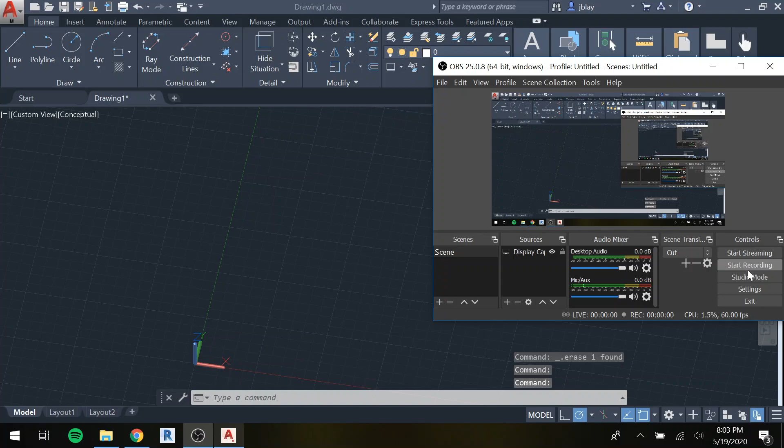The last thing we're going to talk about today are polar arrays for 3D objects. This can be very useful, especially if you're creating something like a gear.

So that's what I'm going to create here, a gear. I'll start with a circle at 0, 0, and give it a radius of 5 inches. Let's zoom in on that.

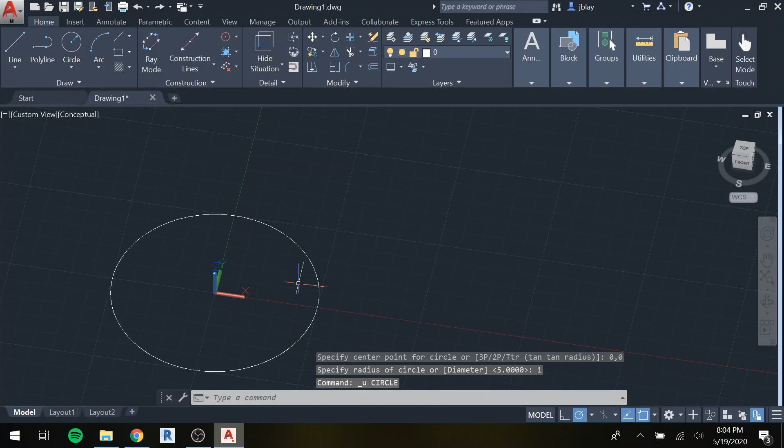Then I'm going to put a hole in the center of it, as most gears have, with a radius of 1 inch. Start at 0, 0, give it a radius of 1 inch, and press pull it up 3/4 of an inch.

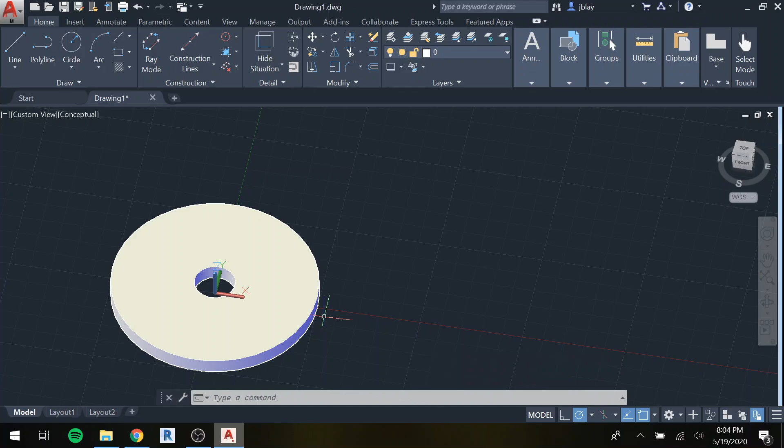Now what I'm going to do is create one tooth of the gear, and then pattern it around this cylinder. Let's get started. Because I used press pull, I still have the circle down low, so I can draw my tooth coming from it.

I'll draw this to be 1 inch long this way. Let me hop into 2D wireframe so we can really see what I'm doing. So I just drew a line here that was 1 inch long, and then I'm going to draw a line this way, 1/2 inch. Oh, I think I did these wrong. Something must be off because that's not the right proportions.

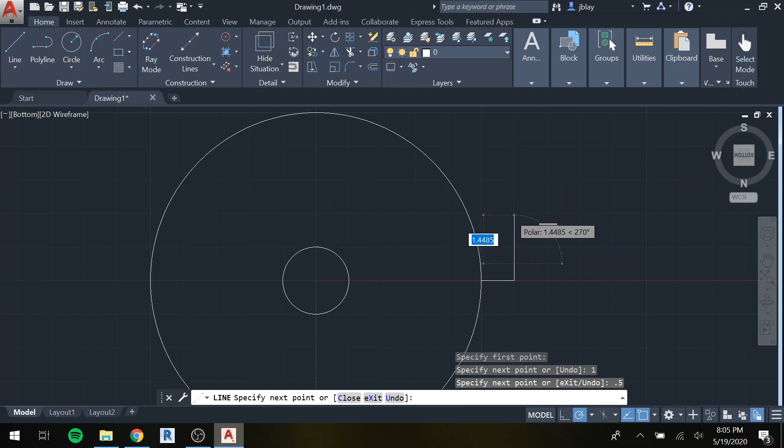Let me hop into looking at the bottom of this. I'll draw a line 1 inch long, draw a perpendicular line 1/2 inch long, then draw down like so, and then I'll mirror these two over to the other side.

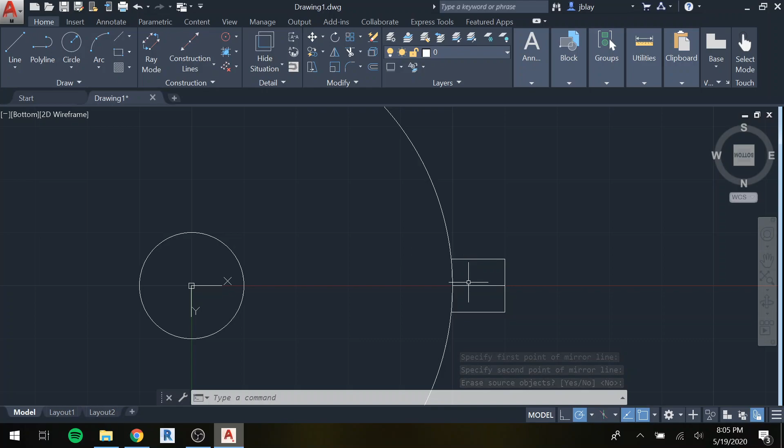If you're copying this and your tooth is a little bit different, it's not a big deal, just make sure it extends all the way to the circle here. Now I can delete this. I don't need to draw the arc at the bottom because that circle still exists, so I have a bounded area, and I can press pull this area up 3/4 of an inch, so 0.75.

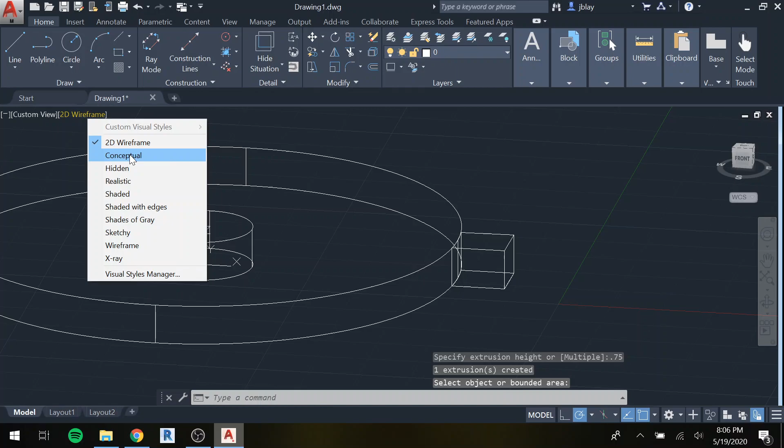Let's hop back into Conceptual so we can see what we have. Okay, we have one tooth of a gear. Obviously, if we were making a real gear, you would want that to resemble more of what the tooth would actually be. It probably has some curve in it, a tooth doesn't really look like just a rectangle, but this is good enough for what I'm showing you right now.

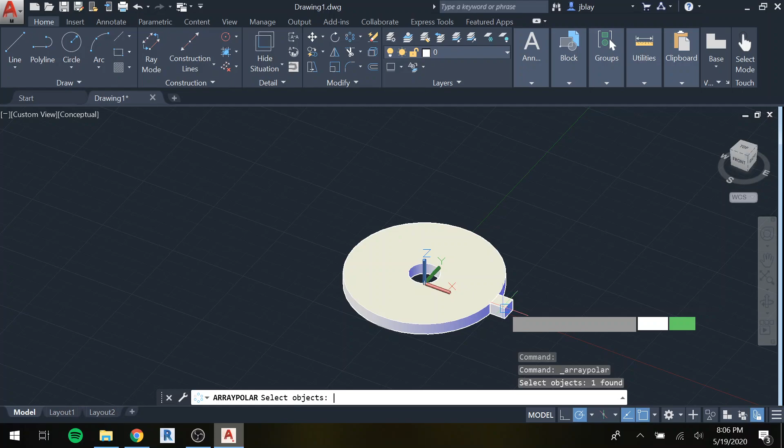So let's go ahead and select Polar Array. We'll select that object and hit enter, and just like with the other polar array when we did it in 2D, we're going to select a center. We can select the top or bottom of this, it doesn't really matter as long as we're selecting a center.

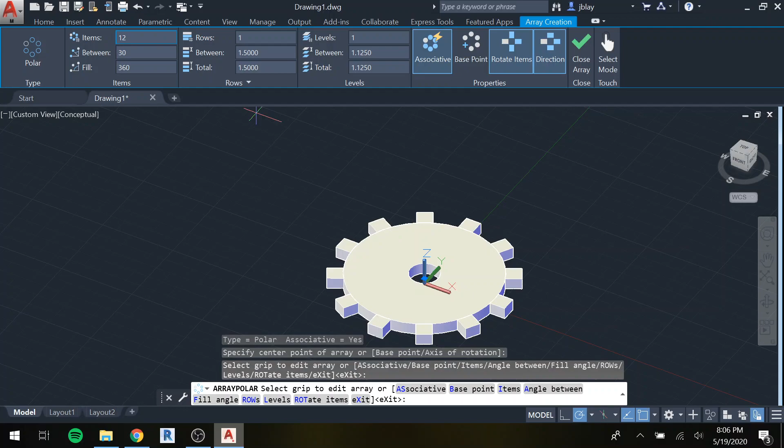Then we change the number of instances we want, I'll put it in 12. I want it to go all the way around, and I'll hit this check mark to close the array. There we go, I have something that really looks like a gear. So that is the polar array, except this time in 3D.